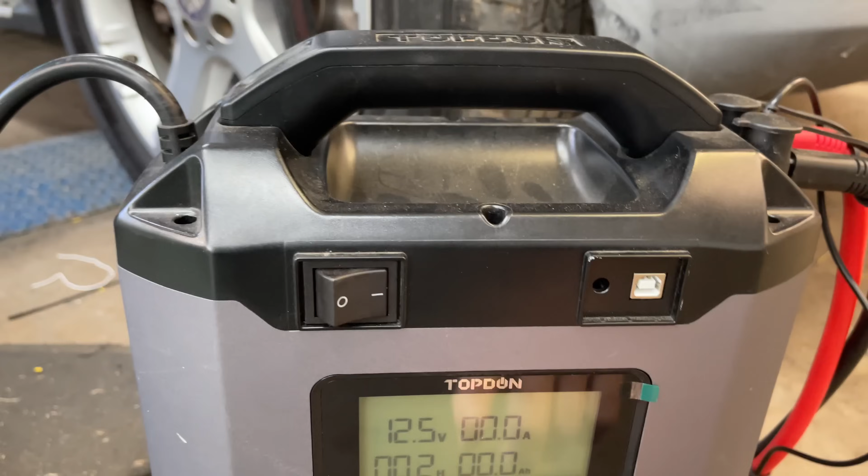Everybody likes a good Mercedes. This one had a battery drain and had it on the charger overnight. We've already started dropping a little bit of voltage. Let's see what the amp clamp is showing here.

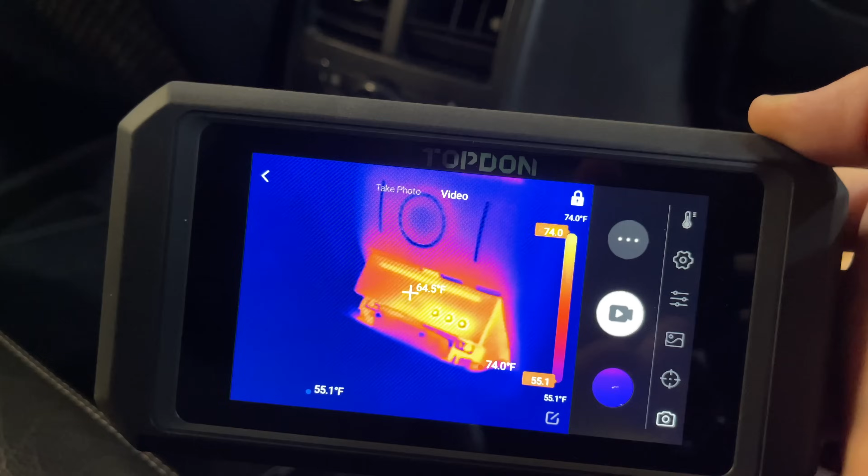Yep, about a 5 amp draw. Let's see what the thermal camera shows. That's a DVD player. Let's see. That's producing some heat, that one's producing some heat. And the radio is producing some heat.

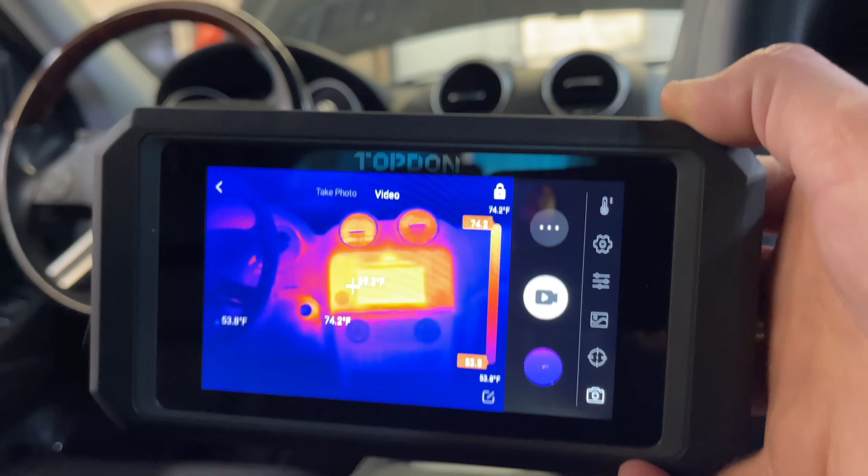This ought to be a fun one.

What's going on, everybody? We got ourselves a Mercedes with a parasitic drain, and I don't even know what it is. I've not scanned it, I've not done anything other than get it in the shop and get the battery charged. So let's get a scan tool on this thing, get a scan on it and see if we got any codes or anything like that. See if we can figure out a direction to go with it.

We already seen with the thermal camera that basically the entertainment system is kind of on. Everything's off, but it's definitely producing some heat, so it's drawing some current. We got 5 amps being drawn on the system. That's a pretty good bit.

So let's get into it. And if it sounds a little echoey on the microphone, well, it's because we are cleaning the shop out. We are in the process of moving, and I've got to get this thing figured out before we can leave. So let's see what we can figure out.

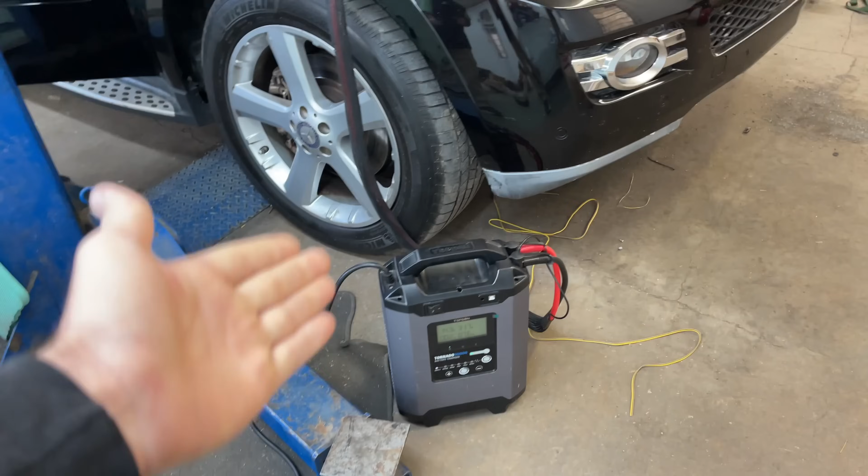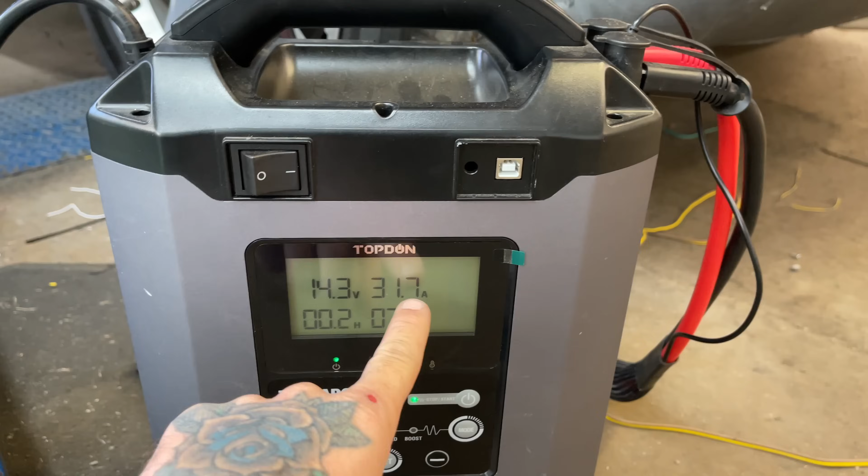So we got the key on this thing, and it's got an air suspension system. And for some reason with the key on, it is running the pump all the time. This is a prime example of why you need a battery maintainer. Look at this, 30 amps just to key on. We're having to hold it at 14 volts just to help with the current. If I lowered this, the current would actually be a little higher. But man, 30 amps with just a key on, that's gonna kill a battery super fast.

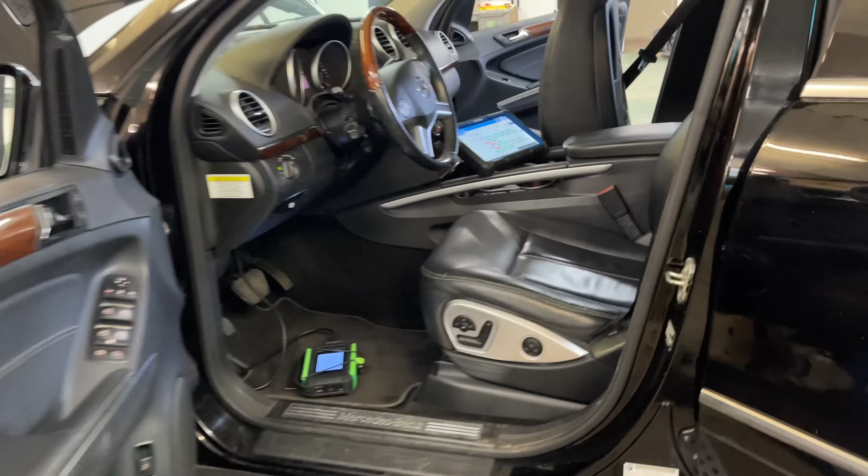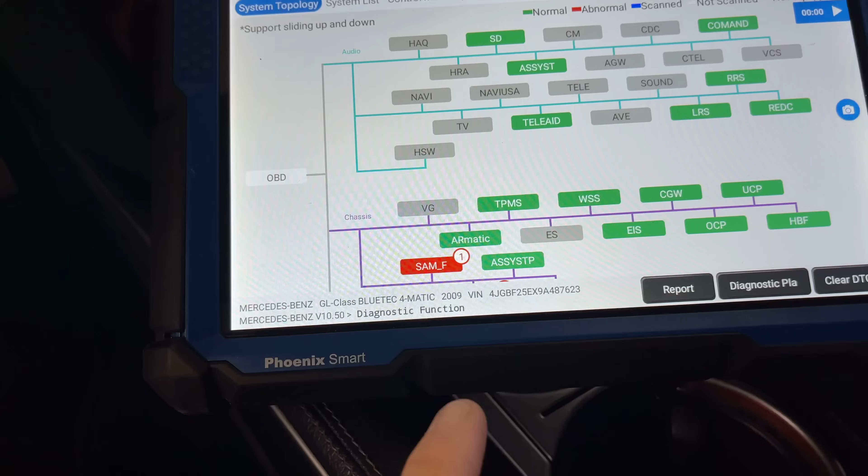But I went through, done a pre-scan, had a bunch of voltage codes in it, so I cleared it, and this is all that has come back. So we've got a lot of grayed out modules that might not matter. By the way, this is a 2009 GL, and it is a diesel.

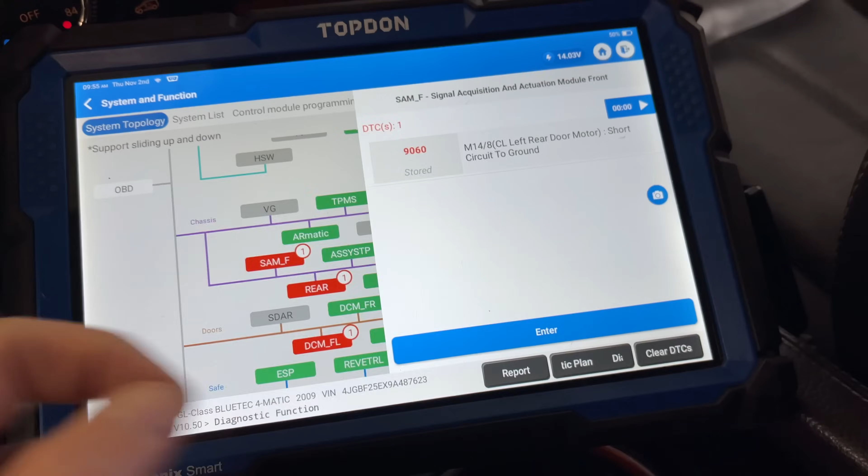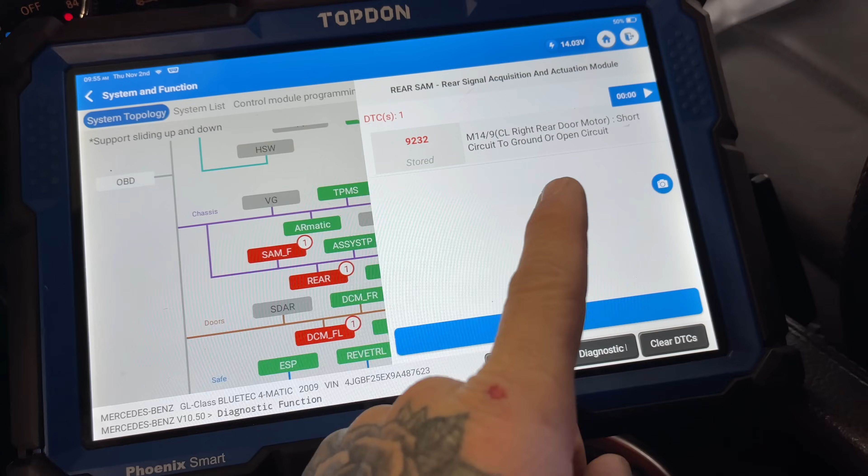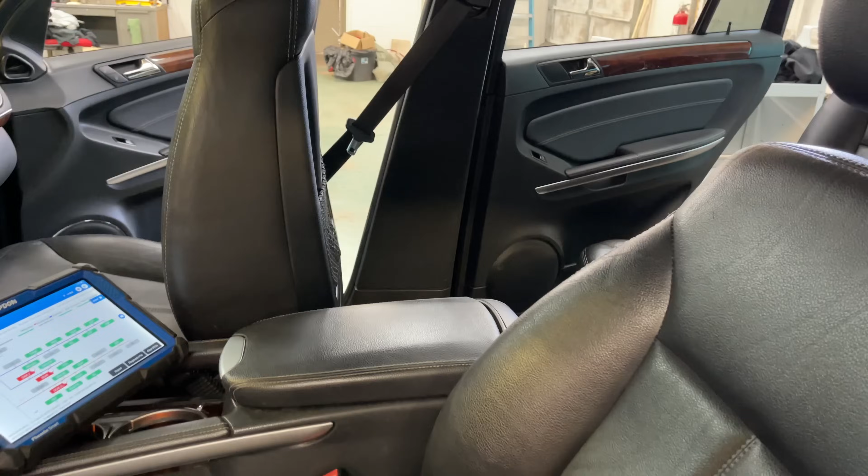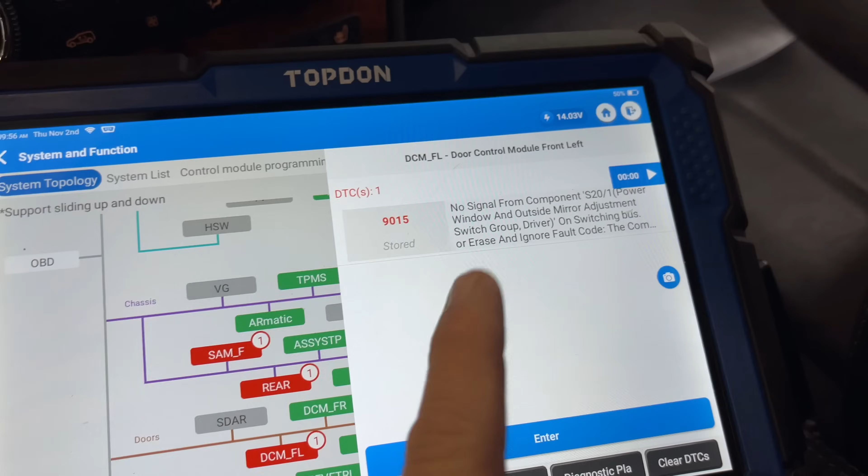But we've got in the front SAM, left rear door motor short circuit to ground. It's set as stored, and then the rear says the right rear door short to ground. I'm not sure if it's because I've got both the doors open, but latched them both. I don't know if it's a fake code, because of how I've got everything open but latched, I'm not real sure. And then we got this, no signal from component S20/1, power window and outside mirror adjustment switch group driver. That's a mouthful.

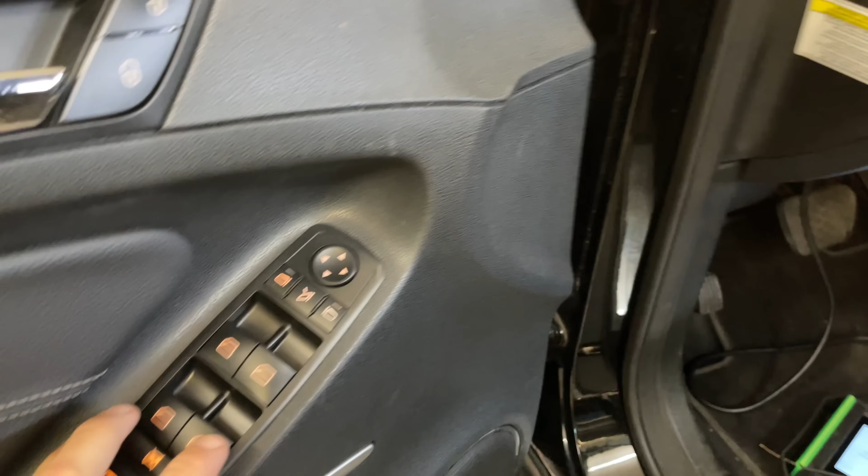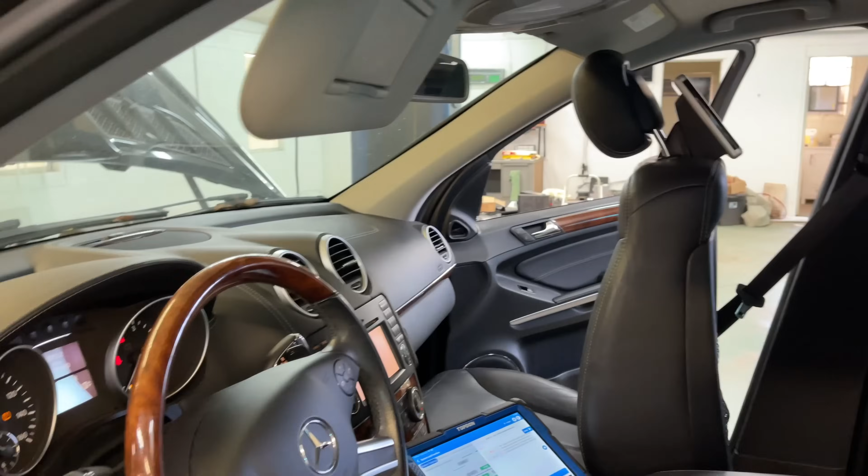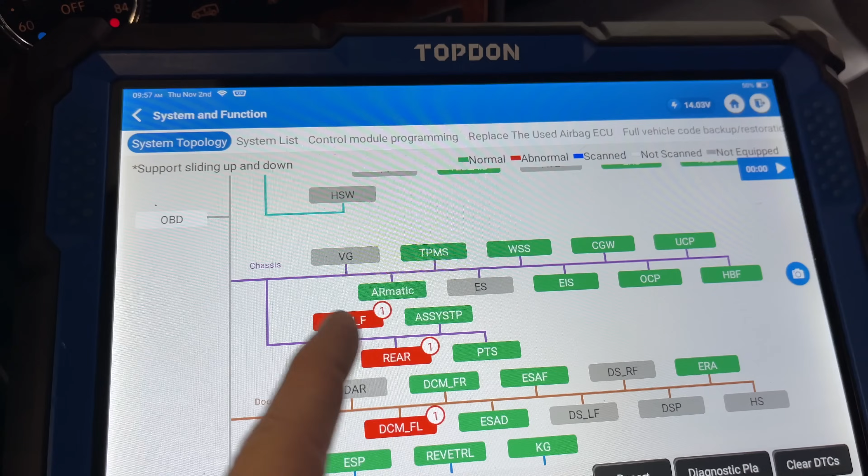That is setting in the door control module, and I'm guessing it's talking about this, but it seems to be working. Both mirrors folded in, so I'm not really sure what that code's all about. It also says stored, and it won't clear either. These codes cleared and came back after I started it, so I'm not real sure.

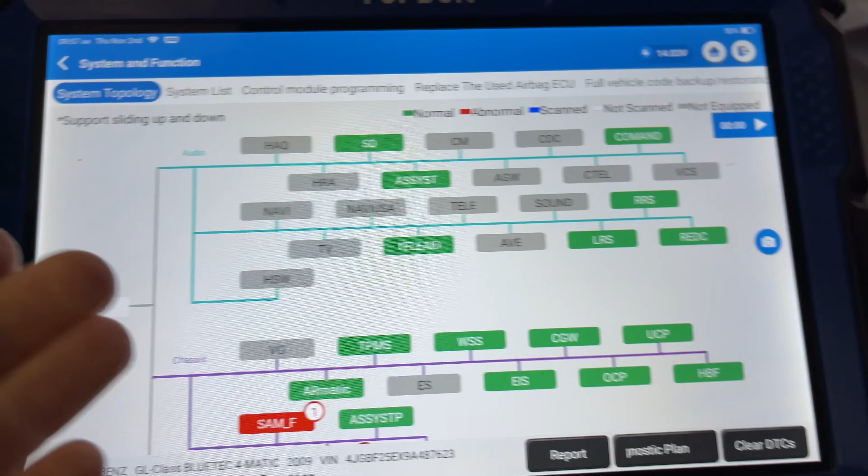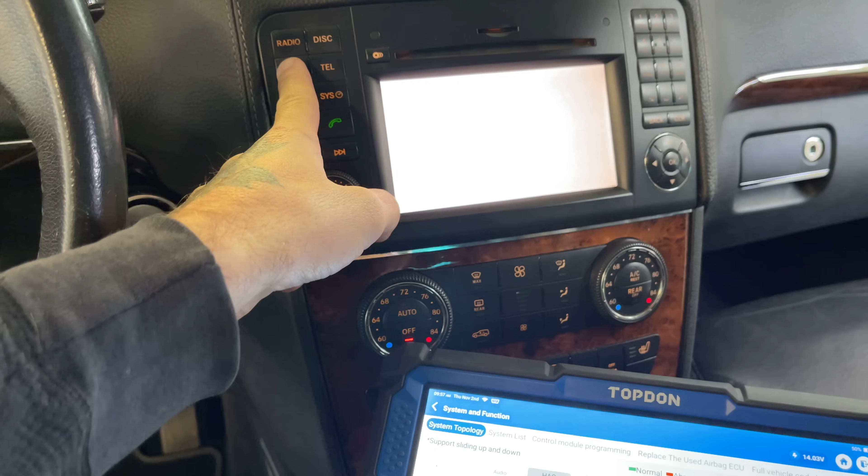But from our preliminary with the infrared camera, the thermal camera, we ought to be looking at infotainment system stuff, and it's all green except the display is blank. The radio does work, but the screen doesn't do anything, it's just white out, like. So not real sure there, but either way, it doesn't seem like we've got any kind of actual issues.

So I'm going to turn it off, unplug the scan tool. I've got all the doors to where I can get in and out of the car now. I'm just gonna let everything go back to sleep. Let it sit here for a few hours while I go do some other stuff and come back and see what's going on with it.

I'm gonna leave the battery maintainer on. I'll probably lower the voltage down to about 12.8 or so, its normal battery voltage. And we're just gonna let it sit here for a while and come back and recheck it.

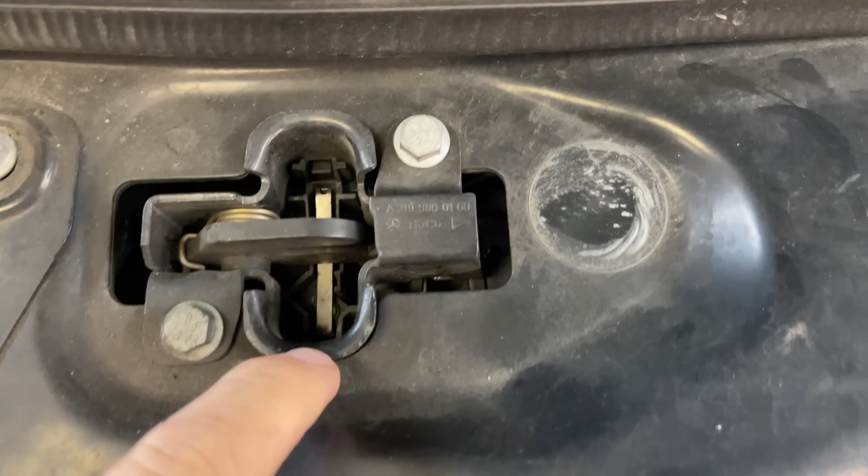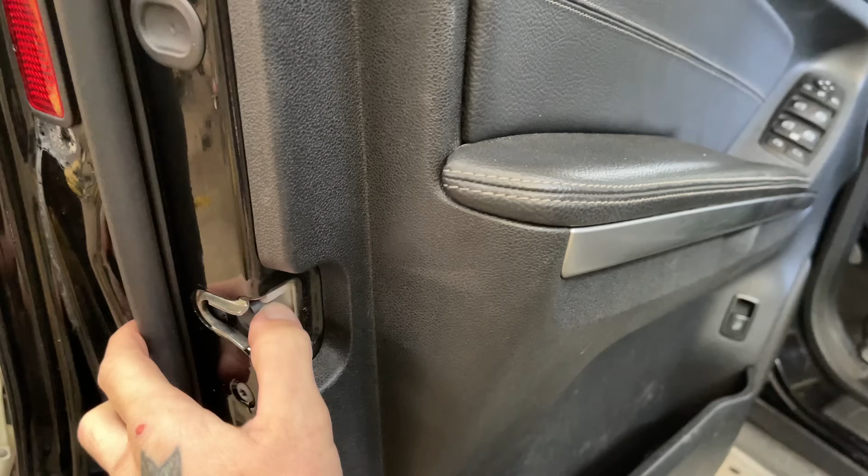If you've got the hood open, you've got to trip the hood latches. This is a micro switch in here, so you need to trip that so it thinks the hood is closed as well. Got the key out of the vehicle, you can see the cluster is still on. You do need to open and re-latch a door so it thinks you exited the vehicle, and we'll let this go to sleep and see what happens.

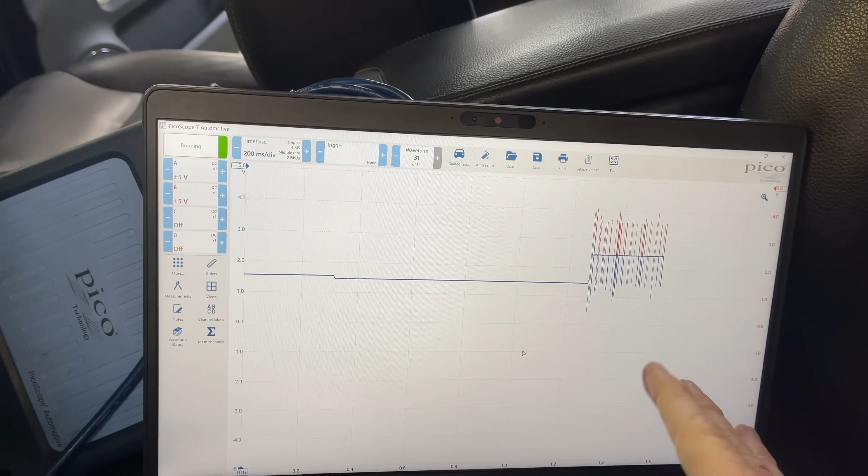It's actually the next day, and the charger here is still putting out current, so we still got a current draw. I just hooked the Picoscope up, and our network is definitely trying to go to sleep and getting woke back up. This is just the DLC, and this has a gateway module, so something is actually just waking the gateway module back up, or it is waking things back up.

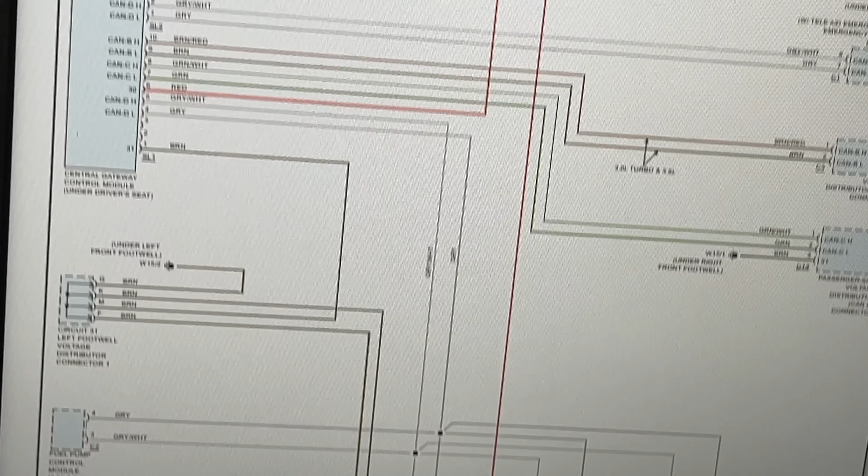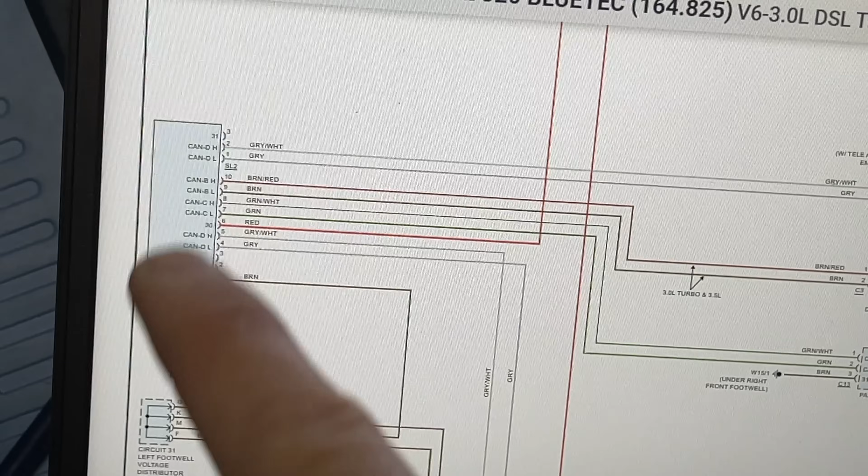Here's a little diagram of it. We've got 6 and 14 down here on the DLC. Let me zoom you in here. It shows that CAN bus actually runs to the fuel pumps and a fuel pump control module, which is kind of weird, before they go to the gateway module. Then the gateway module splits out and has CAN B, C, and D, it looks like. But there's also D coming back out here to something, so I'm not sure if internally that's tied together or not.

But we need to get to this gateway. It's under the driver's seat. We need to get to this thing and see if we can separate the network out and see which one's actually awake and causing our issue.

So I had to move this thing outside. We're gonna be taking the lift down today, and I noticed something a little strange, and we'll see if we can reduplicate this. Put it in drive.

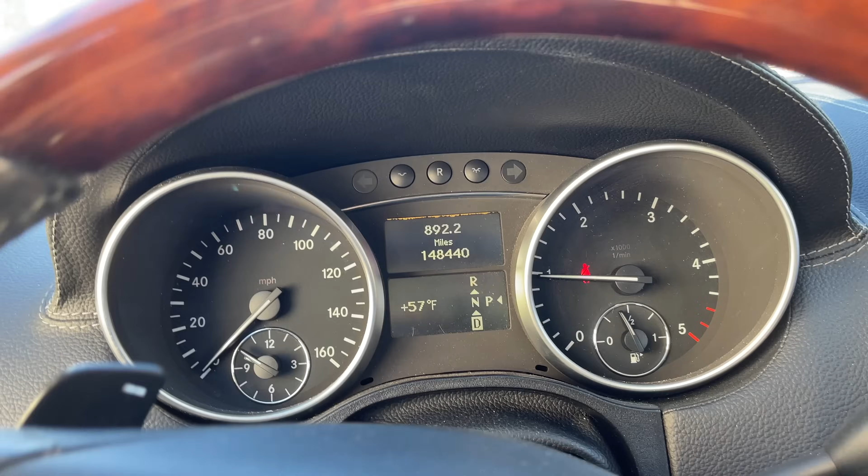That right there, it thinks the hatch is open. Hatch is shut.

But could the hatch be part of our issue? Possibly. If you remember the Tahoe video, the 2022 Tahoe, I think it was, or 2020 Tahoe, we had a latch issue, kind of, on that parasitic drain. Maybe this one's something similar. So let's get into this and just kind of see if we can narrow down what's going on here.

Well, it has been a little over a week since I was last working on this. I'm a little rusty where I was at with the last clip in the video, so if I repeat something, sorry. Still working on this Mercedes, and I think where I left off was I noticed when I was driving it, just moving it around, we had a rear hatch indicator pop up on the cluster there.

And we know the data networks are staying awake. If I remember right, we seen that they were trying to go to sleep, but then they'd get woke right back up. Yeah, I think I narrowed it down to the infotainment bus is the one waking back up, making the powertrain come back on. I think, I'm not real sure.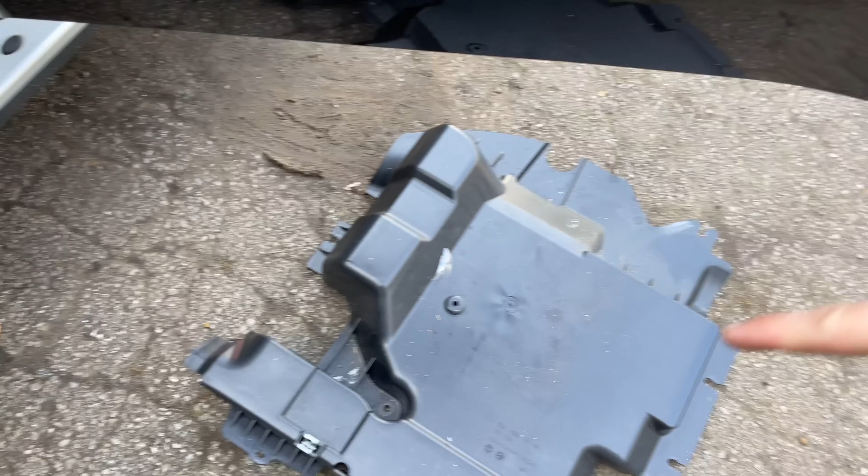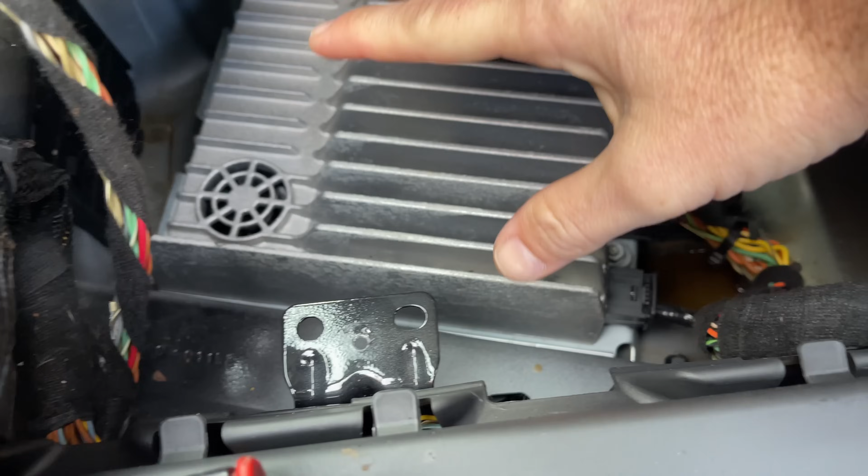I got the seat out of here and got to the gateway. This thing's kind of a booger to get to. It's down on this little plastic bracket here. That's the amplifier, and if you look right there, there is some water down there. But all this is covered with this nice piece of plastic, so what little bit of water that is down in here, it had to have rolled around everything. Nothing got dripped on, and it's not really been too high in there. You can kind of see that middle bracket right there. It's just barely been up on the bracket a little bit.

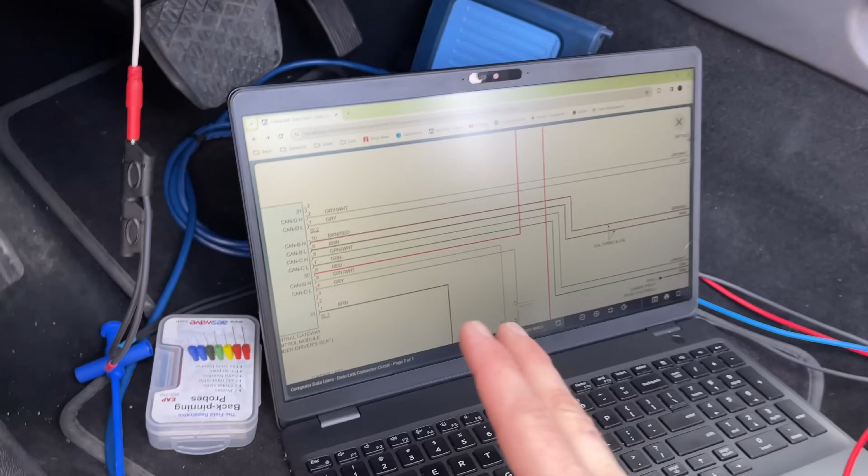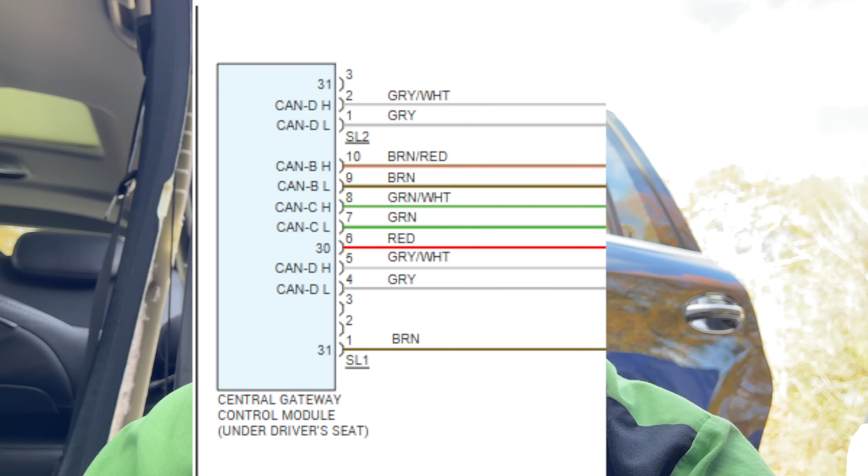So anyway, I've got 2 channels on the PicoScope. On the diagram here, I've got ALLDATA's aftermarket diagram pulled up, just because it puts all the networks into one picture, makes it a lot easier to show you guys what's going on here. So right here we've got our gateway module, and you can see there's a CAN D, a CAN B, a CAN C, and another CAN D right here. Well, one of these CAN Ds comes down to our data link connector, which have our fuel pump.

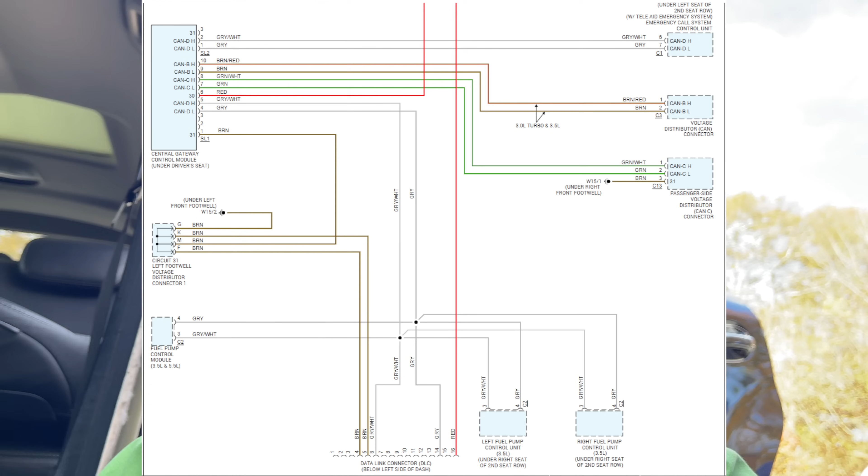I guess it could have a couple different options for fuel pump. We're diesel, I'm not sure which one this has, don't really care yet. But we've got fuel pumps there and the DLC connector, and that one is going into pins 4 and 5. Now keep in mind, this is CAN D. We also have another CAN D up here, which is also gray and white, and it goes over here to an emergency call system control unit.

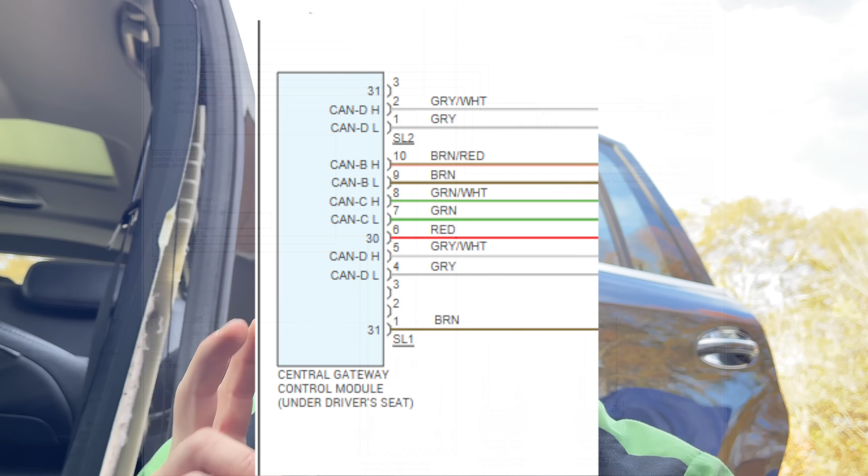So by the way that looks, it looks like those are just bridged internally in the gateway module. So we got 3 CAN lines here, 3 different ones, a B, a C, and a D. But we're just going to start with 2 channels right now. If I need to, I'll go grab another set of leads. But we're back probed into CAN C and CAN B here.

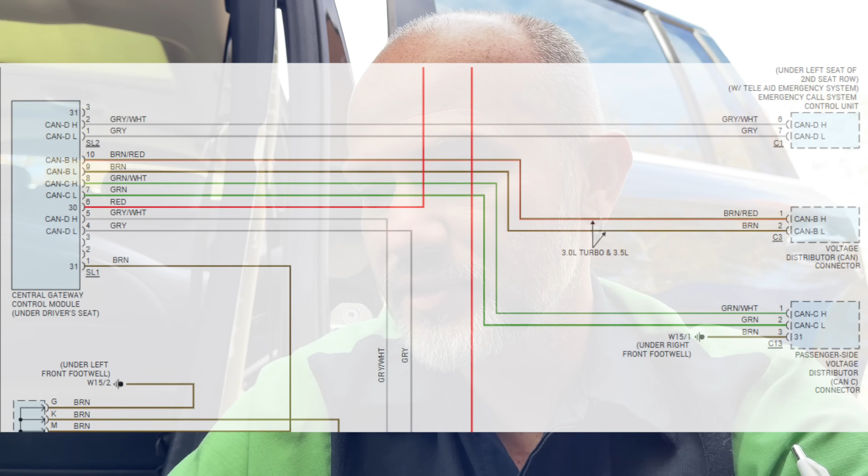CAN B runs over to what they call a voltage distributor connector. Think about like the newer Chryslers that have the star connector, that's kind of what this is. So that diagram is actually in another picture that shows us all that. What we're focused on now is just which network do we need to go after. So we've got that voltage distributor, and then we've also got a passenger side voltage distributor for CAN C.

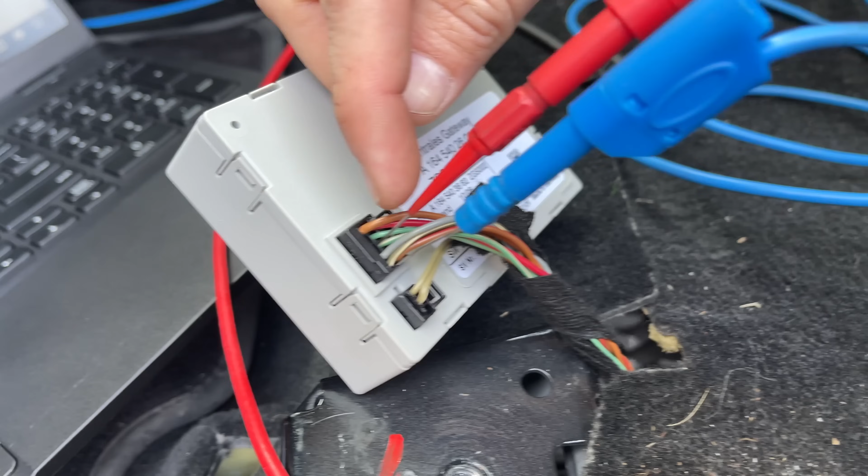And for my picoscope leads, I've got channel A here in the green and white, which is CAN C high side, and channel B is in this brown with a red stripe. Not sure if you guys will be able to see that, but brown with a red stripe there is channel B. So let's go over to the picoscope and see what is happening with these networks.

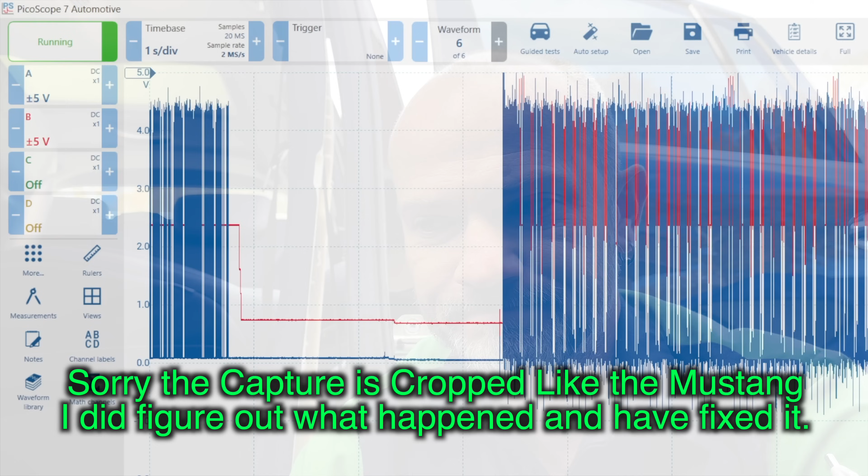And that's a little bit strange. As you can see, it tries to go to sleep and wakes back up, but this channel B is very strange. Yeah, let's stop it when it turns back on here.

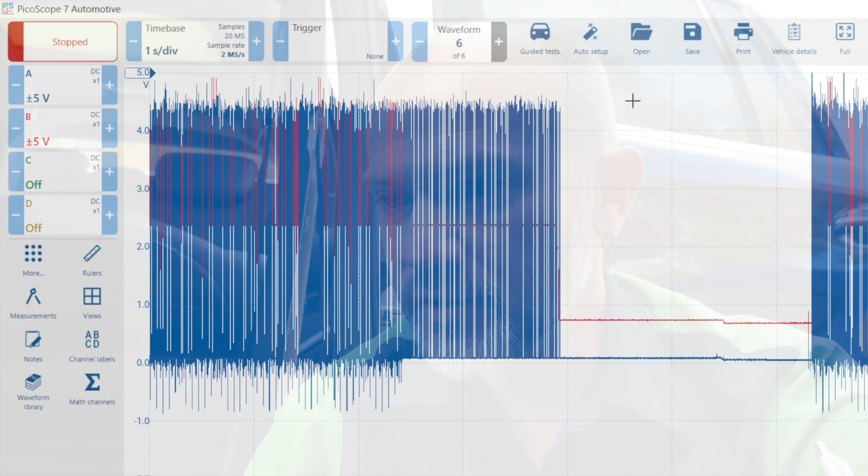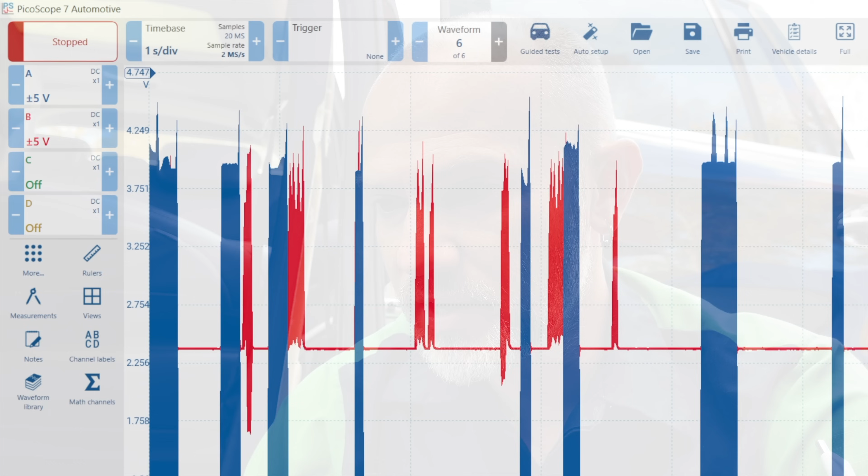If we zoom in right over here, this is where both things are on, and you can see our red channel here is going to sleep. Let me turn off the blue. See, our red trace here is trying to go to sleep. You can see it drops down to a little under a volt.

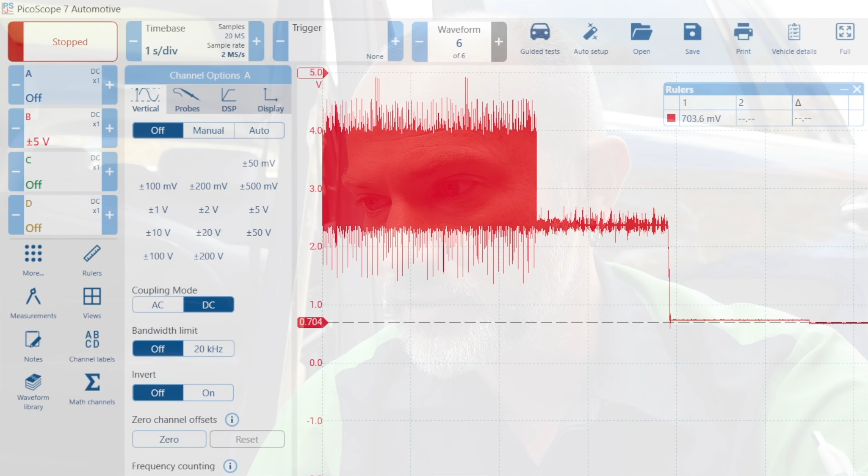It gets down to 700 millivolts before it gets woke back up, or it's turning back on right over here.

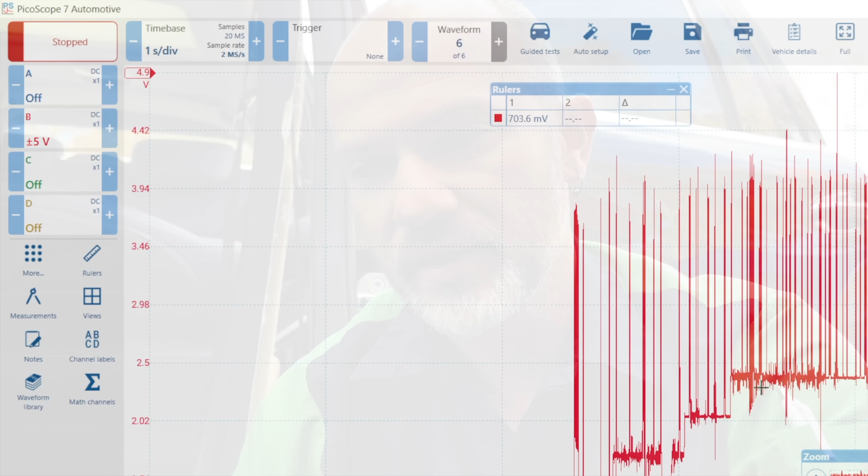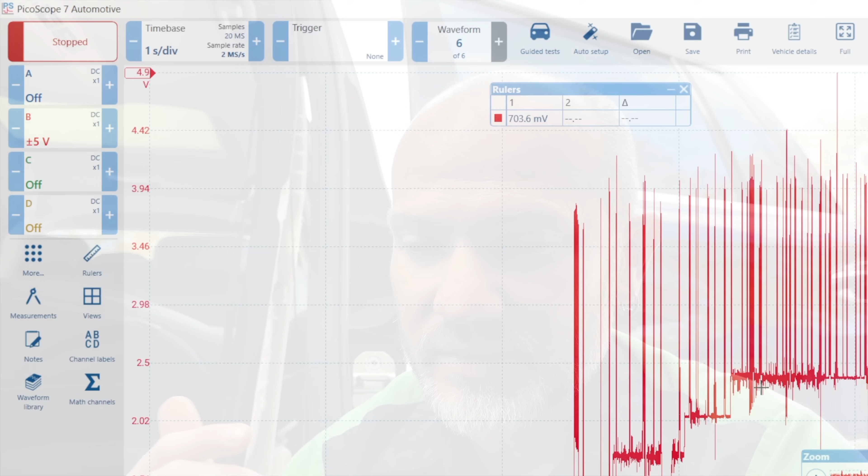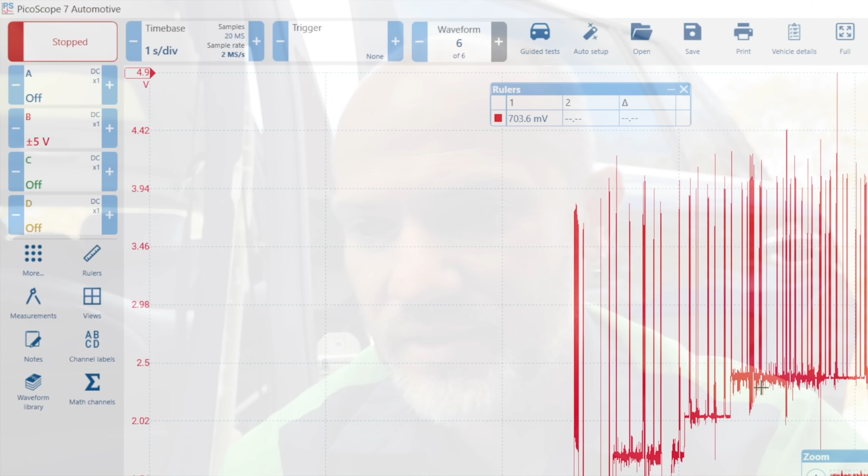You can see our bias voltage here, it gets a little wonky when modules first start waking up. I'm not too concerned about that. Modules don't really care about the bias voltage, they care about seeing the data packet. They're comparing the two basically. So if we still have enough of a voltage swing from one side to the other, the module's still going to know what the message is. So the bias voltage is really only there to aid in diagnostics. It does do some noise rejection, noise canceling type stuff, but I'm not really too concerned with this just yet.

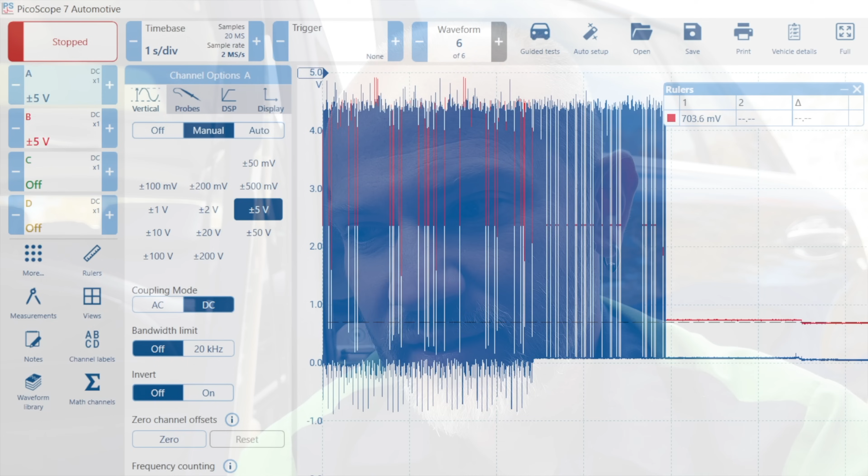I'm more concerned with this blue channel. Let's turn this back on to 5 volts here, and yeah, it is swinging a lot more than the 1.5 volts that it should, and the bias voltage seems to be at ground.

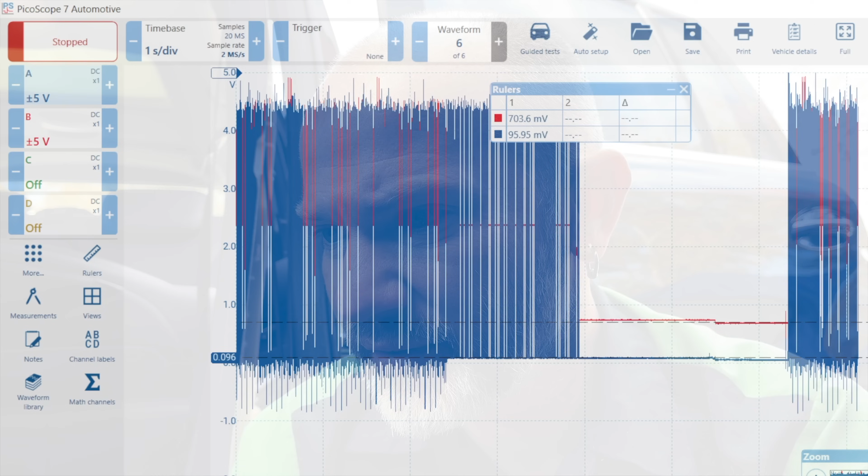That's a little strange. You can see right here it's basically biased at ground and is swinging all the way up to 5 volts. And if we zoom in right over here, you can see it is staying awake longer than the red trace is here. It's staying awake, turning off, and then turning back on.

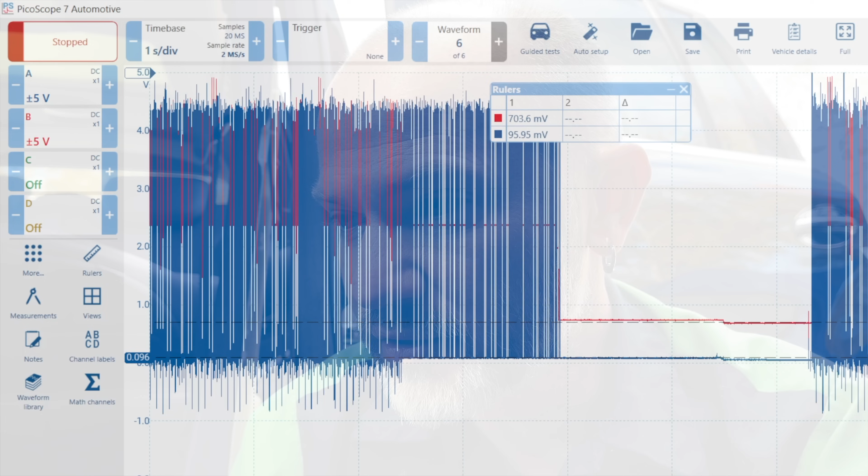So which one is happening first, blue or red? Well, if we zoom in real close here, we can see the blue channel just has a ton of activity going on. Let's zoom in a little tighter, and we can clearly see the blue trace here is having a ton of activity happen before the red channel turns back on.

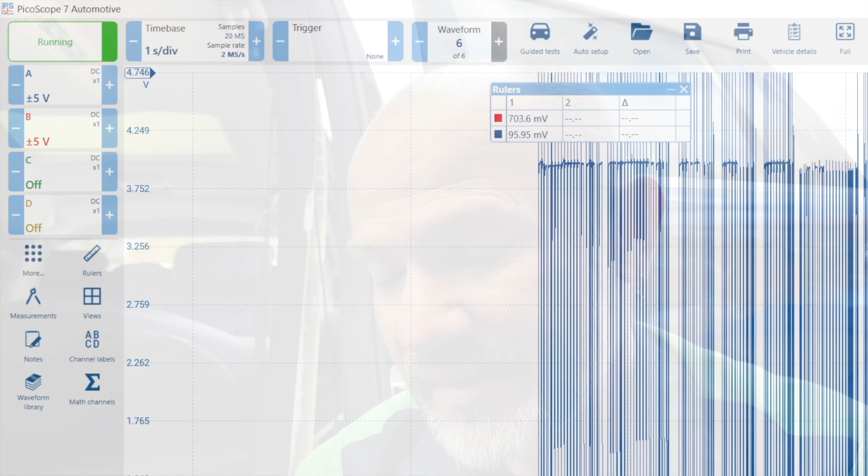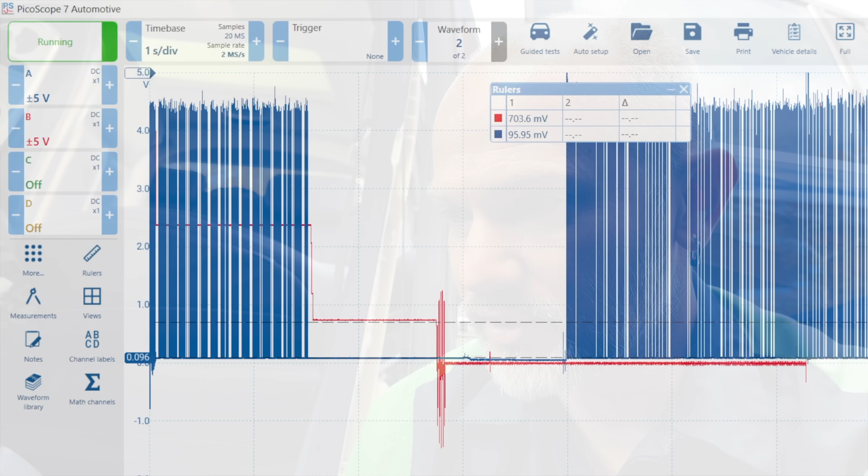When I first seen this, I was like, I wonder if my lead is messed up. Maybe, because I've got one of these blue leads where the ground side is messed up in the connector, it'll do weird patterns like this. But if I take my red trace here and touch it in to the same spot, nope, it overlays perfect and has the exact same pattern.

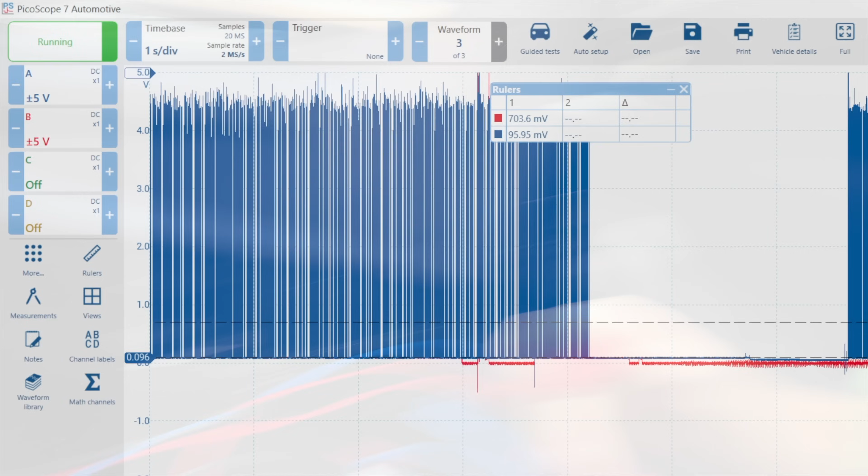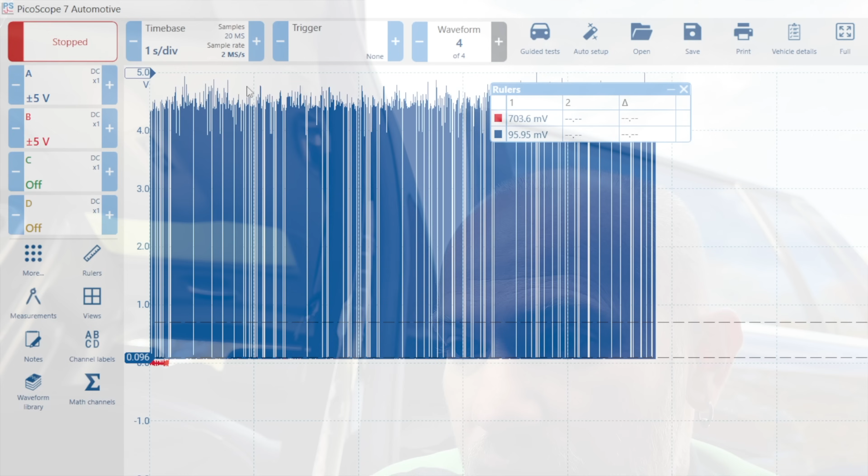Let me pin it in here so you can see what I'm talking about. So we're in there, let's pause this, and we'll separate them a little bit. You see that? Exactly the same pattern, so it's not my lead.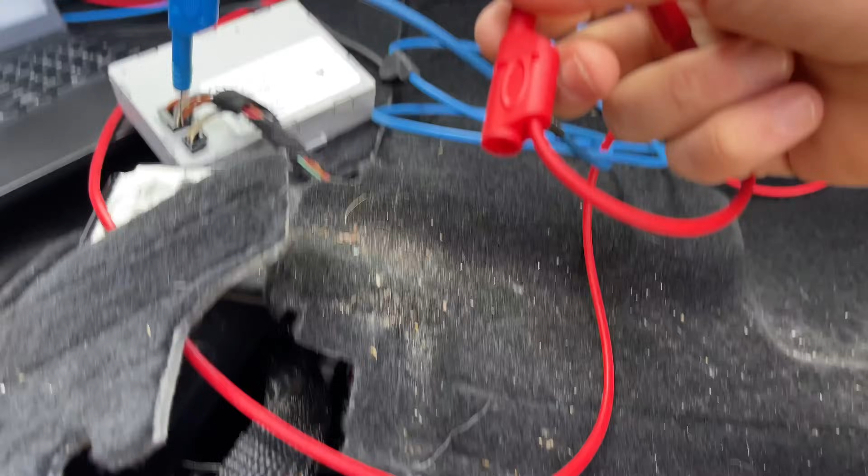That CAN bus is doing something very strange. Okay, so let's line these back up again. I now want to know what the low side of that line is doing. So let's unplug this here, and we're going to back probe the other side of this right here, if I can get it in there. These connectors are super tight. And what's the voltage doing up here?

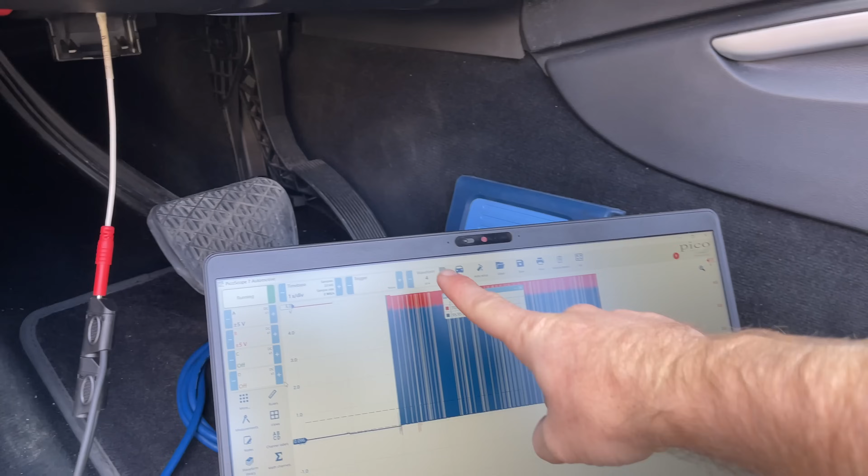Let's give this thing some more voltage here. It looks like this CAN line is swinging from 0 to 4.5, and from 5 down. And did you see that when it turned off? It went up to 12 volts.

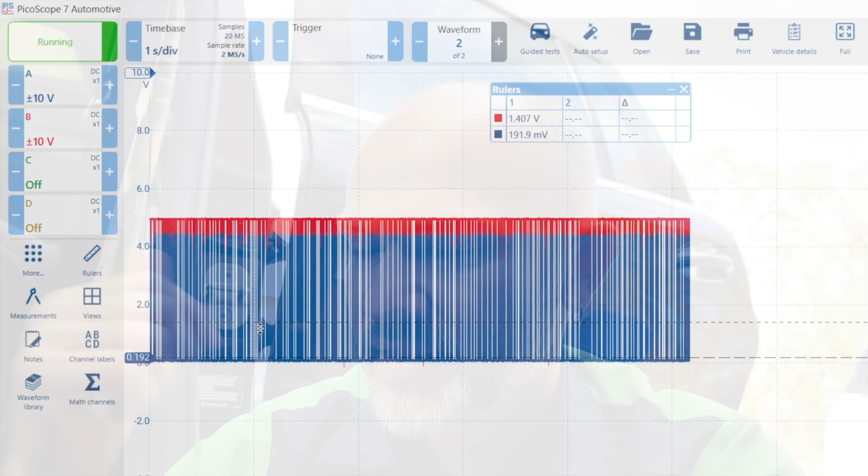Let's see if we can get this in all in one screen again. No, it's going to be off on a separate screen. Let's see if we can make all this happen in one screen. I want it to go to sleep, wake back up, all on one screen. There we go.

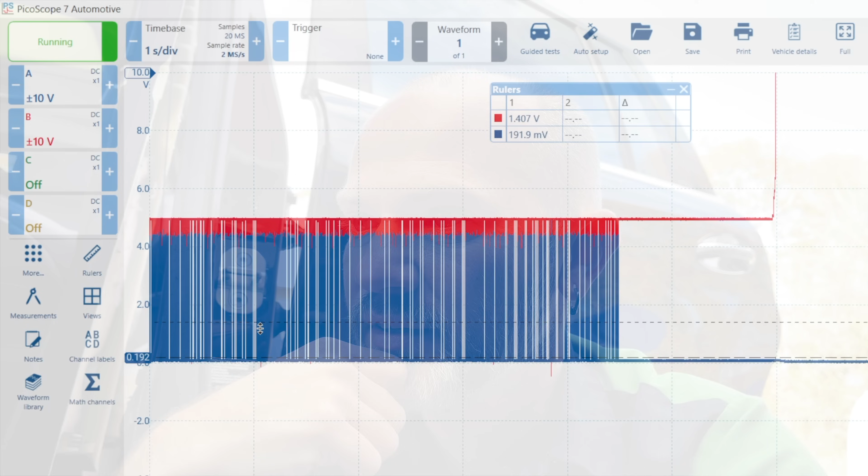You see this? Something's not right with this. I really don't think this CAN bus should be working like this.

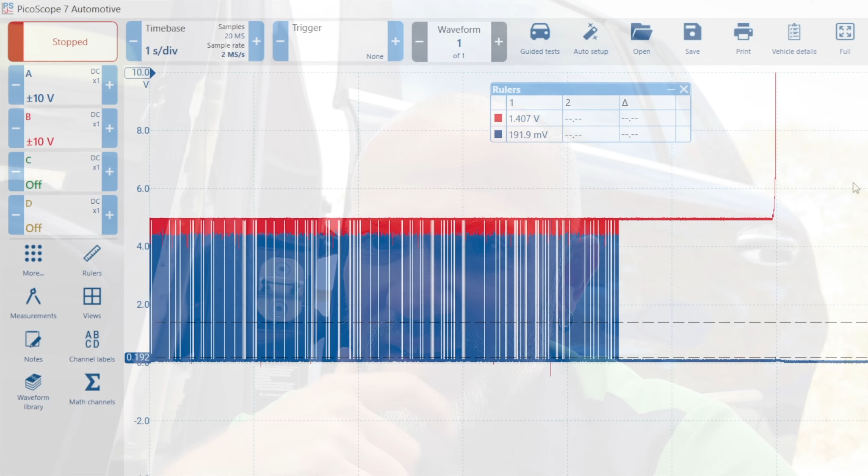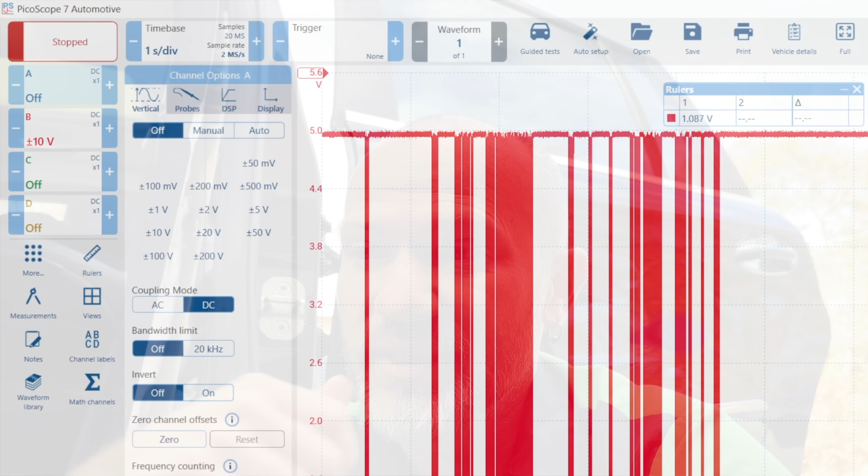Let's zoom in over here where we're turning off. Everything's going to sleep. Let's turn this one off. You see how we're getting a full 5 volts down to 1 volt? That's a 4 volt swing there. This is a very strange CAN bus message.

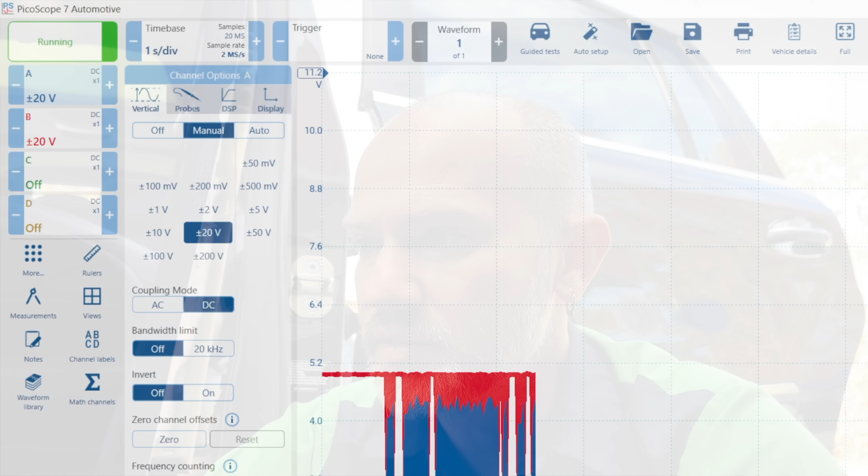It's very strange. Let's turn this one back on to 10 volts. Actually, let's go 20 volts on each one of them, and we're going to see if we can't get both of these in one capture again. All right, so it's turning off, 12 volts, back on. That is super strange.

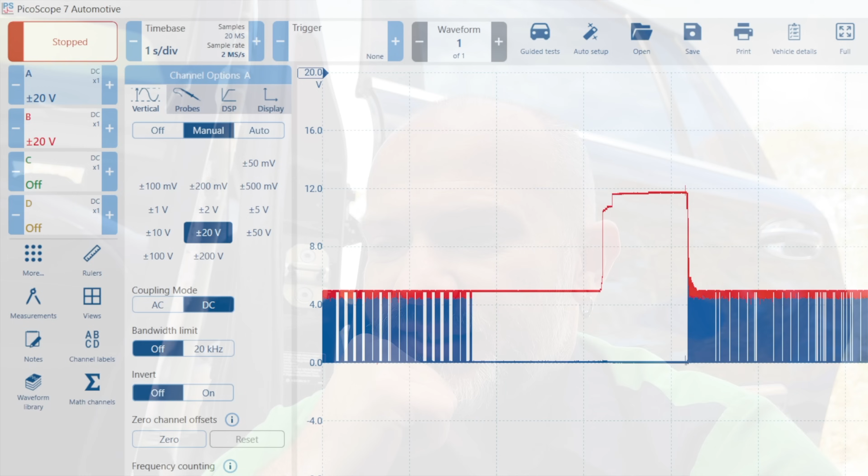I just don't know, like I've never seen a CAN bus act like this. I have a hard time believing that is how it's supposed to be. Real hard time believing that is how it's supposed to be. And we're on the brown traces here.

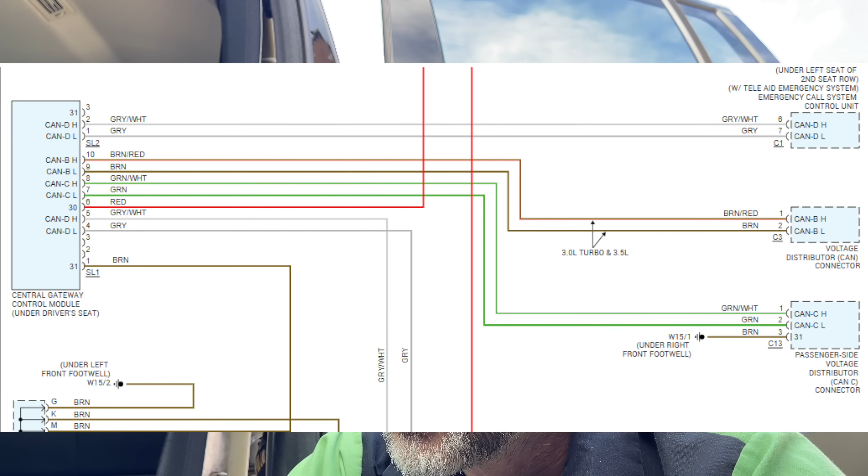So let's go back over here to our wiring diagram, and that is CAN B. So let's go to this voltage distributor connector and see if maybe we can unplug a few things and get like a normal CAN bus pattern.